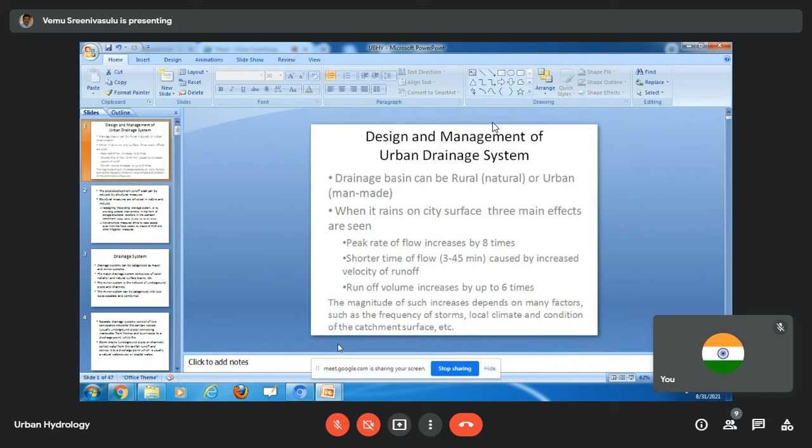Okay, the magnitude of such increase depends on many factors, such as frequency of storm, local climate and conditions of the catchment surface. The post-development runoff peak can be reduced by structural measures. So our objective is, you have to decrease the peak runoff, right?

That is our objective. So what is the purpose of providing a flood control reservoir? If the reservoir is not there, the peak of the hydrograph will be very high. If your reservoir is there, you can store the flood water temporarily and release it slowly. So therefore, you can reduce the peak. Once you reduce the peak, it cannot inundate the areas beside the rivers, because the river can carry this flood water safely without inundating the sides of the banks. Similarly in urban areas also, our objective is to decrease the runoff peak.

So how can you decrease it? There are some structural measures. They are physical in nature. That includes redesigning the existing drainage system. If the drainage system is not adequate to accommodate this peak, you have to redesign it. Or providing suitable interventions in the form of storage at suitable locations in the upstream catchment. So some type of detention storage tanks can also be constructed at the upper catchment.

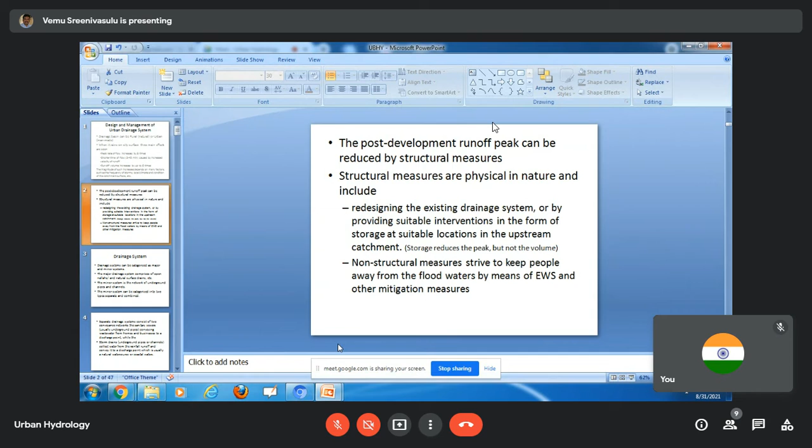Drainage system. The drainage system can be categorized as major and minor systems. The major drainage system comprises open nullas and natural surface drains. The major drain systems are open nullas.

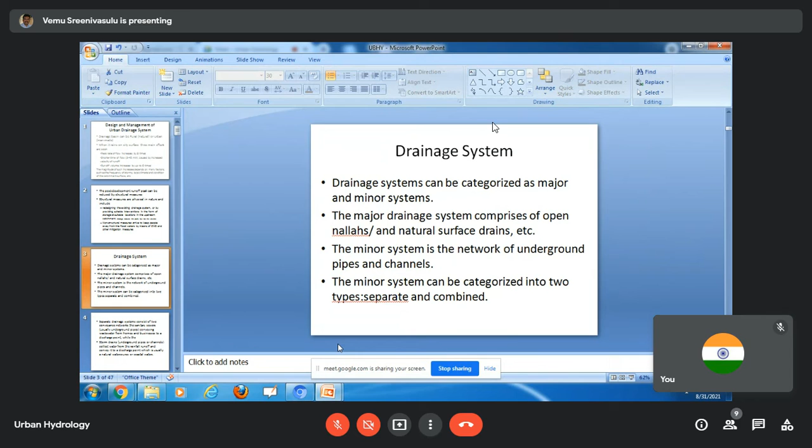Sometimes it may be open, sometimes it may be closed also. Underground pipes are called a minor system. So major system, minor system. The minor system can be categorized in two types: one is separate and another is combined.

Separate means a separate drainage system consists of two conveyance networks, the sanitary sewers conveying wastewater from homes and businesses to a discharge point. So in a separate drainage system, pipes are used to convey the sanitary and sewage water that is collected from homes or from any business like hotels, shops, malls. That is the separate.

And there is a separate system for the storm water. Two network pipes are there in a city. One is used for the drainage purpose and another one is used for the storm water purpose, right? So that is the separate. Storm drains, the underground pipes or channels, collect water from rainfall runoff and convey it to a discharge point, which is usually a natural water course or coastal waters.

So storm water drains, which may be underground pipes or canals, collect the water from the rainfall runoff, and it will be discharged at a place where there is a natural water course, I mean some river is going on, so there you can discharge this drain water into the river or any coastal waters. Even you can discharge into the sea also.

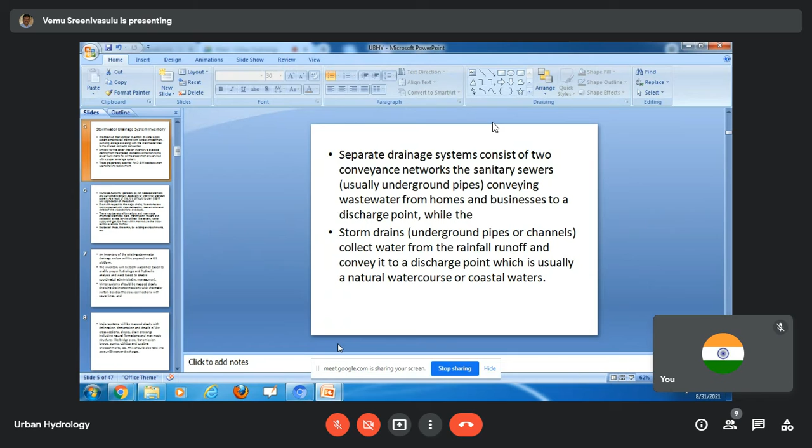A stormwater drainage system inventory. There should be an inventory. First of all, if you want to take any decision, you should have the data in your hand, right? Then only you can take any decision for designing or for maintenance purpose or anything. First you should have an inventory.

Inventory means what is the drainage map, their cross sections, their slopes, where pumping is taking place, where lifting is taking place, where the detention ponds are, where the natural drains are, and contour maps. All those things come under this drainage system inventory.

So it is observed that a proper inventory of the water supply system is maintained, starting with the details of treatment, pumping, storage, and along the main feeder lines to the smallest domestic connections. So all those things, if we have them on your table digitally or manually. Digitally means you have digitized everything using GIS or remote sensing techniques. Then good decision making can be taken up using that data.

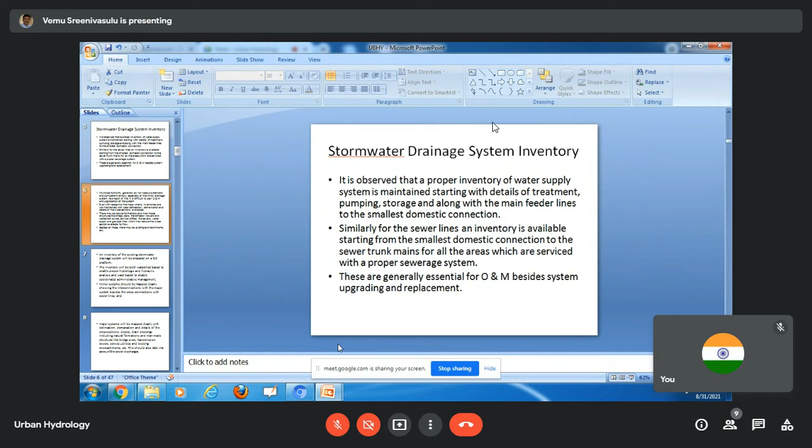Municipal authorities generally do not keep a systematic and complete inventory, especially of the minor drainage system. As a result of this, it is difficult to plan operation and maintenance and upgradation of the system. That is true. Generally, if you go and ask for any drainage data, they don't have it; they are not maintaining this inventory. They can give you the major pipes or major drains, but they don't have the minor drains, right?

So they don't have minor drains in the form of either GIS format or on a map. Otherwise, even if they have, they are unable to utilize those inventories because they are not trained. So that is a major problem any municipality or authority will generally face while doing operation and maintenance or upgradation of the system, right?

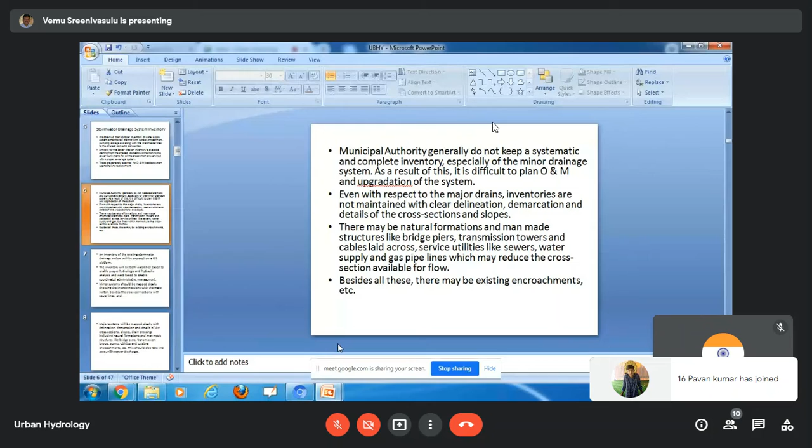Even with respect to the major drains, inventories are not maintained with clear delineation, demarcation, and the details of cross section and slopes, right? So if you have a drainage system, when a drain is there, you have to demarcate the area for that drain. Say like a catchment, you know how to demarcate the catchment. A catchment collects the water and drains it off through a single outlet.

Okay. So how do you demarcate the drainage system? Catchment. If you have a contour map, you can draw the ridges. So that is the catchment. If you have the outlet point, from that you can demarcate. That means if you draw an outlet and draw a ridge line, within the ridge line the water will pass through that catchment. Outside the ridge line, the catchment is different.

Okay. So if you have a pipe there, you have to demarcate the area from where water will come into this drainage system. Okay. So there may be natural formations and man-made structures like bridges, piers, transmission towers, and cables laid across service utilities like sewer, water supply, and gas pipelines, which may reduce the cross section of flow.

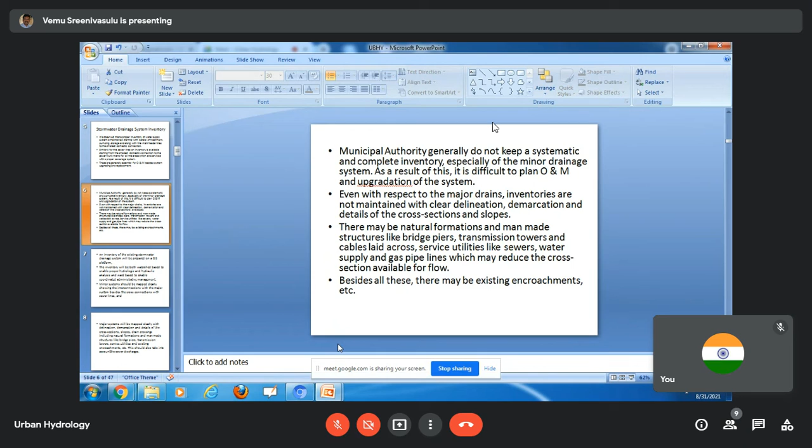If the cross section reduces, it means the carrying capacity of water of that nalla is reducing. So because of that also flooding takes place in nearby areas, right? So this is one reason why flooding takes place over the town. Okay, besides all these, there may be existing encroachment, etc. An inventory of the existing stormwater drainage system will be prepared on a GIS platform.

Okay. Now, GIS, Geographical Information System, is there. So you can easily digitize everything which has a spatial connection. Like a drainage system has a spatial connection, right? So those things can be easily digitized using any GIS platform. There are a number of GIS softwares. So you can use any GIS and prepare an inventory of the drainage system of an entire town.

Okay, that inventory will be both watershed-based to enable proper hydrologic and hydraulic analysis, and ward-based to enable coordinated administrative management. So the inventory will be watershed-based to enable proper hydrologic and hydraulic analysis. Right? This inventory, as I said, the boundary of the inventory is not the political boundary.

It means that suppose there is a drainage in ward number 1. It doesn't mean only the water falling on ward number 1 will come to this drainage, right? It follows only the natural boundary. If the natural boundary falls in ward number 2 also, the water collected from ward number 2 will also come to this drain, which is located in ward number 1. So what I am trying to say is that all hydrological analysis can be taken up on a natural boundary, right?

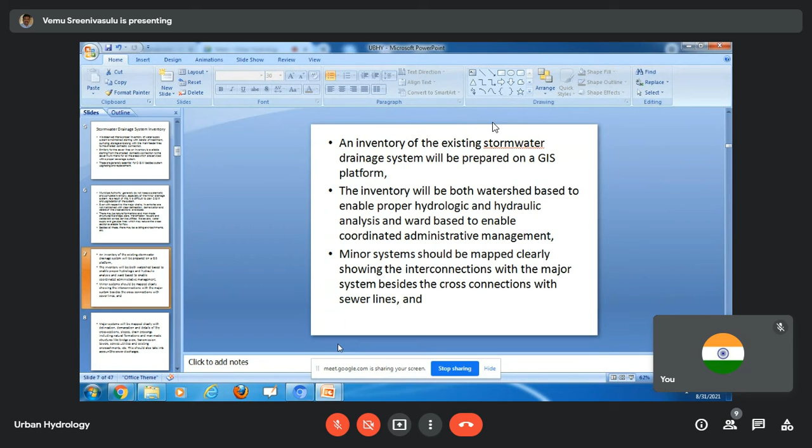Spatial data means if it has a location, latitude, longitude. The properties of the sewer system, like diameter, when it was constructed, the length, the slope, all those things are tabular data. The major system will be mapped clearly with delineation, demarcation and details of the cross section, slopes, drain crossings, including natural formations and man-made structures like bridges, piers, transmission towers, service utilities, and existing encroachments.

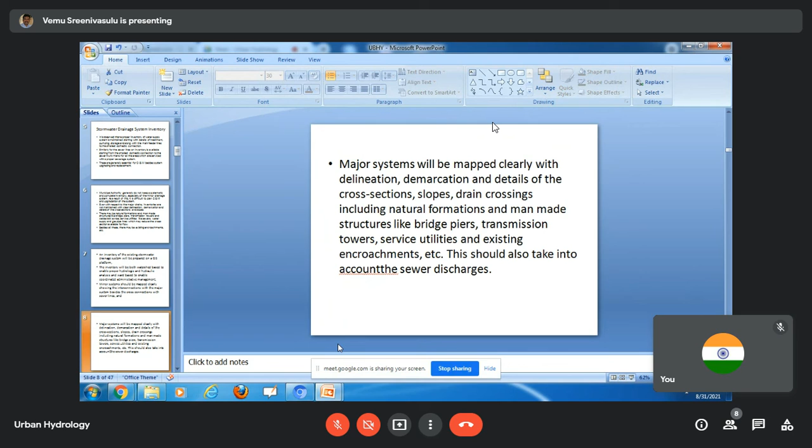They should also take into account the sewer discharge, so this also you should map. And the requirement for urban drainage design: there is a need for the development of an adequate and functioning drainage system based on sound hydrological and hydraulic design principles. So you cannot design just like that. You have to follow the hydrological principles.

Hydrological principles means, for example, runoff depends upon infiltration, the intensity of the rainfall, and the time of concentration. Keep all these principles in mind, calculate the runoff, and for that runoff design your drainage system. Similarly, hydraulic principles means what is the velocity of drainage water in the pipe, whether it is an open channel or closed pipe, and what is the pressure at different elevations.

Okay, all those things, that is our hydraulic principles, right? So both hydrologic and hydraulic design principles should be kept in mind while designing the drainage system. The design of an urban drainage system requires knowledge of the catchment area and topography, urbanization details, rainfall intensity, and hydrology. Okay, so for designing an urban drainage system, we should have a thorough knowledge of the catchment area.

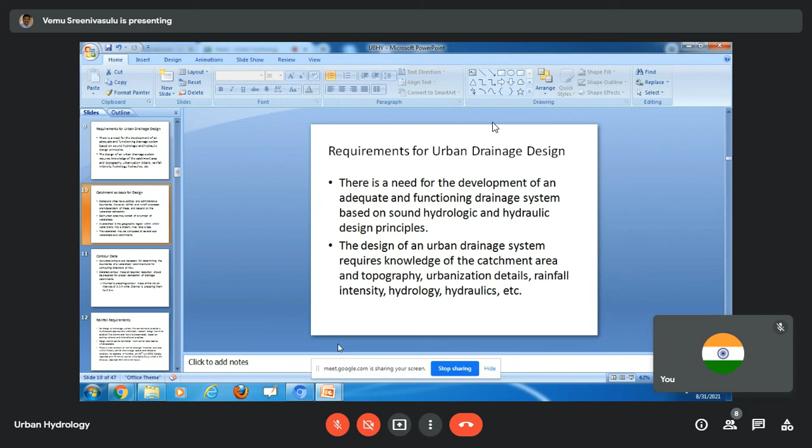Hydraulic data means, if it is an open channel, what is the rugosity coefficient, the surface roughness of the drainage system. So all those things, you should have a thorough knowledge. Then you can easily design the urban drainage system, right? Catchment as a basis for design.

Okay, as I said earlier, catchment is the base for design, not the political boundary. Say for example, you are designing Kakinada. So like we have assembly constituencies for Kakinada urban, Kakinada rural, right? Those are political boundaries, not natural boundaries. Okay, so any analysis should be done on the natural boundaries, not on the political boundaries. So therefore, catchment as basis for design, right?

States and cities have political and administrative boundaries. However, rainfall and runoff processes are independent of these and depend on the watershed delineations. Okay, so the rainfall does not know political boundaries. It only knows the natural boundaries, and it will follow only natural boundaries, right? So each urban area may consist of a number of watersheds.

If there are big cities like Mumbai, it may fall on different watersheds. Okay, right? Or some few small towns also come under one watershed. So that depends upon the size of the urban area. It may fall in a different number of watersheds, or a number of towns may fall in one watershed. Watershed is the geographical region within which water drains into a stream, river, lake, or sea. That is the definition of the watershed.

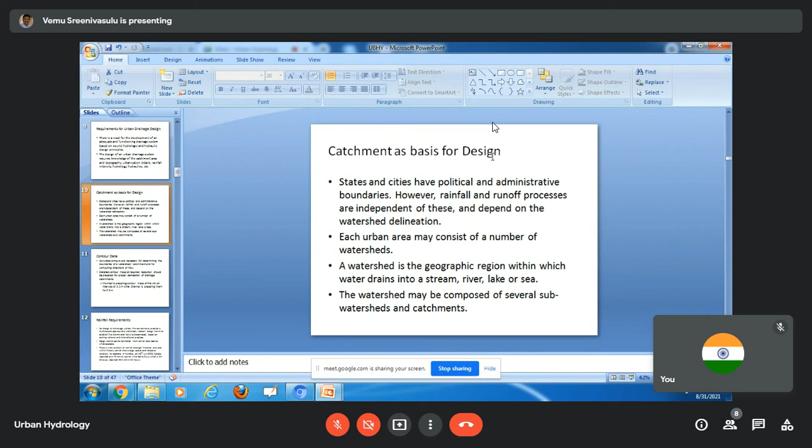Contour data. This is also very important. Accurate contours are necessary for determining the boundary of watershed catchment and for computing direction of flow. Okay, if you have the contour data, you can simulate how the drain water moves. The principle is it moves from higher elevation to lower elevation, right? Detailed contour map at required resolution should be prepared for proper delineation of drainage catchment.

For example, Mumbai is preparing contour maps of the city at an interval of 0.2 meter, while Chennai is preparing for 0.3 meter. Similarly, if you have a contour map for Kakinada, it will be very useful for designing the drainage system. Okay, I will stop here.

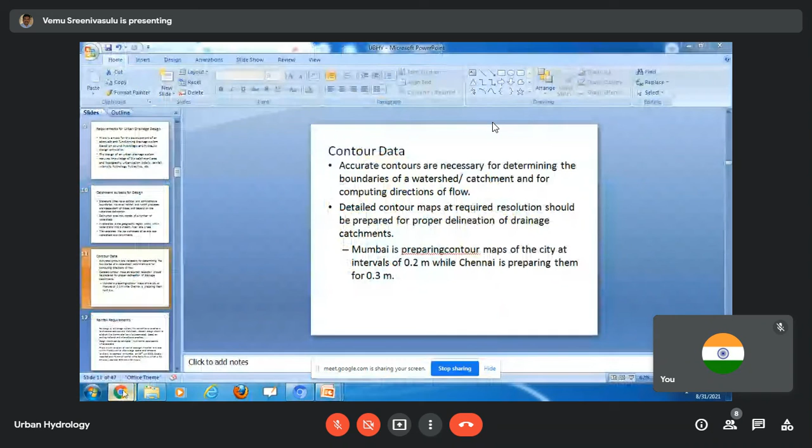Okay. Hello. Sir. ఆపేస్తాను. Okay, sir.